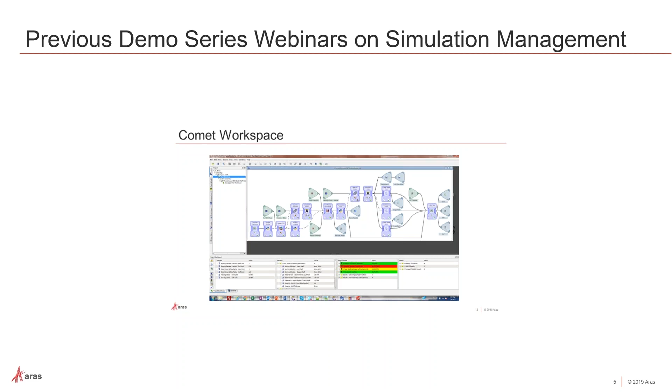So in the second webinar in May, I showed how simulations could now be created, launched, and managed from inside the Aras platform, and how Aras could create a digital thread to ensure that product development teams could easily track what simulation was performed on which version of the design, what results were obtained, who reviewed and approved the results, and where the results could be found. So this approach significantly increases the value of simulation, as teams now have access to the full history of simulation performed on their products.

So now in the third webinar, I'm going to present a much richer environment for product development teams to perform and manage simulations. I'm going to demonstrate how the Aras platform can be used to create, launch, and manage simulations. The user defines what changes should be made to the design and what changes should be made to the environment that's to be applied to the design.

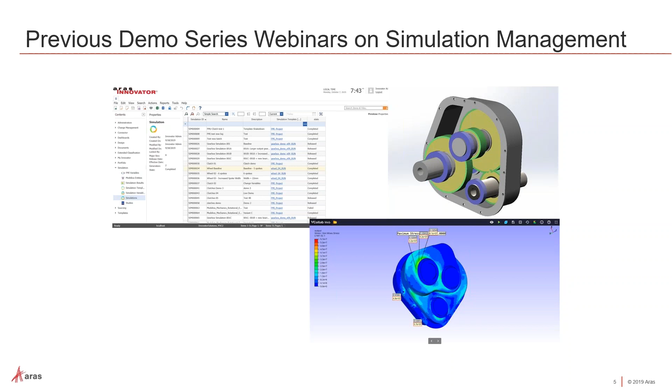And then Aras takes over, communicating with CAD tools, with system modeling tools, with finite element meshing tools, with solver tools, and post-processors. And Aras runs all the simulations and then produces a report. Now that's fairly similar to what I showed in the last demo series back in May, running simulations from inside Aras, but there are three new enhancements that I want to highlight today.

Firstly is tracking trees of simulations and of designs. In simulation land, you hardly ever go from simulation 1 to simulation 2 to simulation 3 to 4. You go from 1 to 1A to 1B. I've created simulations like 1B final, which you can guarantee means you'll need to have another one. So it's important that you track your simulations, understand the decision process that made you go from this simulation to that simulation. What were the differences in the inputs? What were the differences in the outputs? Why did I make those changes? So with a tree of simulations and designs, we can track that from inside Aras.

The second enhancement I want to highlight is chaining simulations together, where we take the results from one simulation and use them as inputs in another simulation. The demo I'm going to show today shows a vehicle hitting a curb, and we run a first simulation, a system model of the curb collision, and we take the forces, the suspension forces, out of that simulation and automatically send them to a stress analysis of the lower control arm. So we've got automatic chaining of simulations now.

And then the third enhancement I want to show is connecting simulation to requirements engineering. Requirements engineering is a fundamental aspect of lifecycle management, and for the first time we can now connect requirements engineering to simulations. So whenever you run a simulation, you can immediately see, does this version of the design meet its requirements or not?

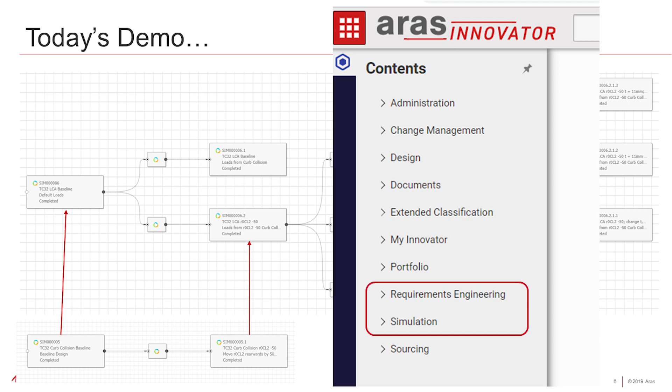So in today's demo, we're going to review a series of simulations performed on a small passenger car. I've run some of the simulations already, and we'll look at them and their results, and then I'll create, launch, and review a new simulation live during the webinar. So here is the use case we're going to look at today. It is a passenger car in a curb collision, and the problem is, will the vehicle damage be acceptable? I'll just let it run through once more. Great. So that's what we're going to consider today.

Let's go back to Aras and let's look at our requirements. Should always start with requirements, requirements engineering, requirements document. A requirements document is a collection of requirements. We have 3 requirements. Let's look at the first one. During this particular use case, so a collision with a 200 millimeter curb at 20 meters per second and 28 degrees, the maximum force at one of the suspension mounting locations must be less than or equal to 100 kilonewtons.

We have another requirement which is similar at a different suspension mounting location. We've got to have a maximum instantaneous force of 20,000 newtons. That might sound like a lot of force, but this is just for a millisecond or so. And then the third requirement is for the control arm itself. In the same load case, we want our maximum stress to be less than 300 megapascals. That's a very high value, but the requirement here is that the control arm should not break. Plastic damage would be acceptable.

Now, of course, a real vehicle or a real product has many sets of requirements. This is a gross simplification, but everything I'm going to show today with this minimal set of requirements and just a few simulations is scalable inside Aras for something as complicated as a full vehicle development program. So those are the requirements that we're looking at today. If I bounce back to PowerPoint again, a vehicle hitting a curb.

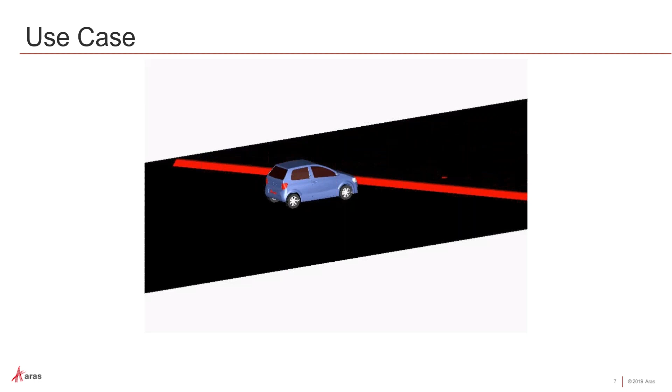So in order to assess the performance of our design against requirements, we need to run 2 types of simulations. First, we're going to run a full vehicle dynamics model. This is what you're looking at here, to calculate forces in the suspension components. And then we're going to do a component stress analysis to calculate the stresses in the lower control arm. Now, for the vehicle dynamics model, we're using a Modelica system model created by Modelon using the Modelon Impact tool, which has been exported as an FMU, a functional mock-up unit.

And the FMU contains definitions of all the variables and all the equations used by the model, and it can be run in isolation. So I don't have Modelon Impact on my laptop, so I'm just going to show some pictures. And that's an interesting point. I don't need to have many of the tools that I'm going to use today on my laptop. Some of them I do, some of them I don't. I can set up Aras so that all I need on my laptop is a browser with everything else running on one or more remote servers.

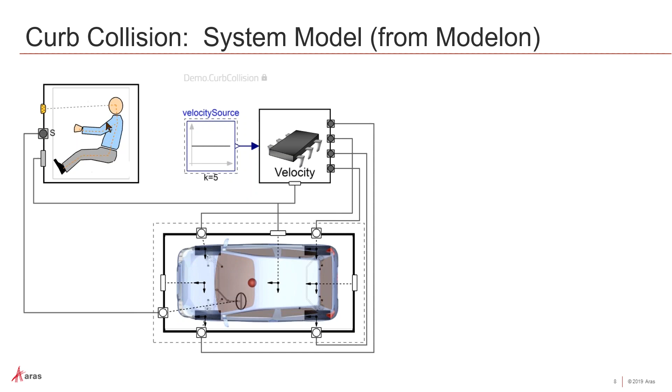So here are some screenshots of the system model. Here's an overview. We've got a vehicle representation, a driver, operating conditions. Here is the chassis subsystem. Here is the front suspension subsystem.

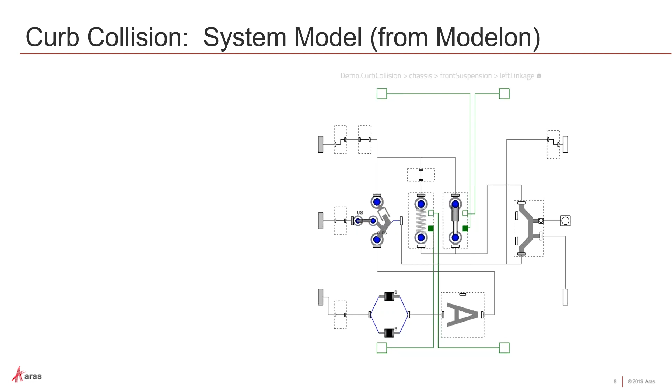And if we go down even further, here's our system representation of the front left linkage. And one of the components represented here by this sideways A is the lower control arm. Now the user, when running this system model, has full control of the geometry of the different suspension components. So these are some of the inputs that we can vary to change the design of the suspension.

And I've imported the FMU, the functional mockup unit representation of this system into Aras, and I've already run it a few times, making various changes. In particular, I moved the suspension hardpoints, as these have a big effect on suspension loads. And I've set up Aras to extract the forces and moments at the suspension attachment locations, and then apply those loads into a finite element stress analysis of the lower control arm.

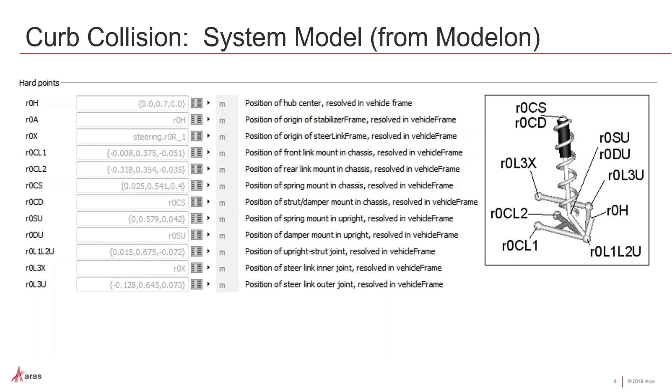So back to Aras Innovator. We've used our product engineering application, and I've created a representation of our lower control arm. So here's the part, TC32 front lower control arm. I can see I have a CAD document attached to it. If I open up this CAD document, here we go. Just take a moment to open it up.

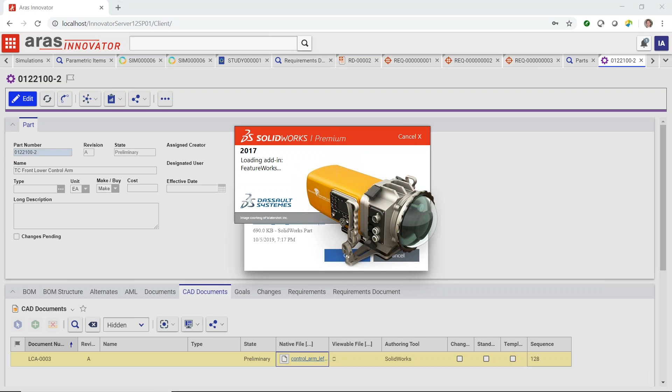This is a SolidWorks model. I can see that I've got a parametric design representation of my lower control arm. And some of the changes that I can make to this, either inside SolidWorks, which is what I'll do now, or inside Aras Innovator and having Aras communicate with SolidWorks, the sorts of changes I can make is I can move the suspension locations, I can change the thickness, I can change these angles to bring this section forwards.

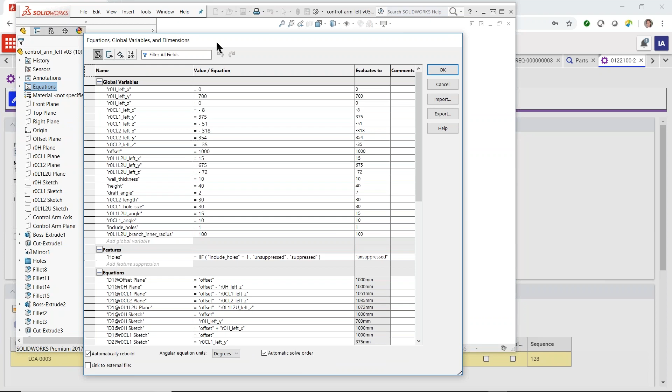So let's just show one of those changes inside SolidWorks. So manage equations. This is a fairly big change, but if I change the X location of the rear inboard attachment location from 318 to 368, when I hit enter, it will automatically rebuild, and you'll see this mount location jump to the left. So that's the sort of change you can make live inside SolidWorks.

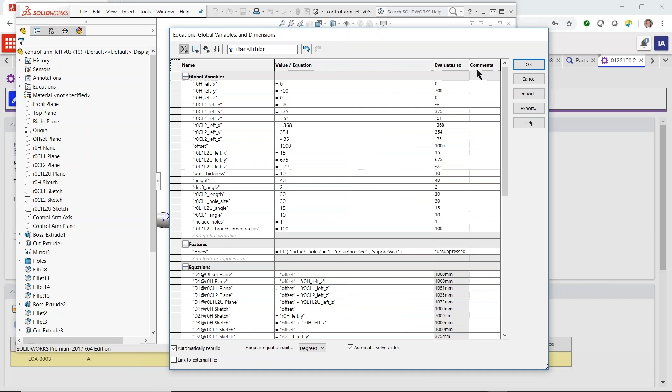And as I said a moment ago, we have a connector between Aras and SolidWorks. That means when I define inside Aras that I want to make this change, the change will get sent off and the CAD will be rebuilt. So I've just described connections to two tools, Modelon Impact, from which I imported the system model, and SolidWorks. And we're going to use connectors to other tools during the stress analysis of the lower control arm.

We're going to connect to ANSA, which we'll use to create a finite element mesh. We will connect to MSC Nastran, which we'll use to calculate the stresses in the lower control arm under the application of the loads from the system model. And then we'll use VCollab to create a smart report, a lightweight, viewable representation of the simulation results.

And these are just a few of the many simulation-related tools that Aras can connect to. And we are vendor and tool agnostic, which means we don't prefer or put limits on the tools that can be used during the simulation process.

So here we are again in Aras Innovator. This is version 12 with its new and improved user interface. Let's just close a few windows. I understand in the next service pack you can close multiple windows, multiple tabs much more easily. But I'm a real fan of Aras Innovator 12.

So today I'm going to show how the user can use Aras to create, launch, and manage simulations. The user defines the values of the design variables they want to use, and then Aras takes over. It'll run the system model of the vehicle curb collision. It will extract the forces. It will then communicate with SolidWorks to build the new geometry. It will create a finite element mesh, run a stress analysis using the forces, post-process, and report.

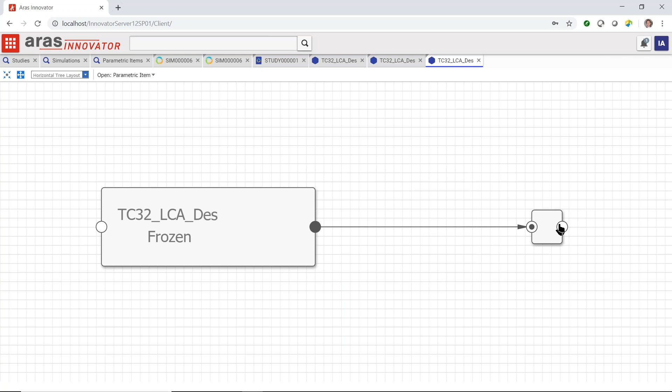So we need to be able to make changes to these design variables and then track those changes. And as I said a moment ago, that's generally not going to be a linear process. So we've implemented the concept of trees of designs to track our designs. So let's go back to our baseline design. Let's go into graph view. Here we're using graph navigation, a fairly recent addition to the Aras platform. Very powerful. Let me just expand some of these nodes.

Here are a tree of designs that I've analyzed. I started with a baseline design. I then created a variant, design 1. I then created 4 variants, 1.1, 1.2, 1.3, 1.4, and then I created a design variant from 1.4. So I can use this tree to review what I did or what my colleagues did. I can add notes to explain the decision process. And so this gives a very rich view of the work that has been performed.

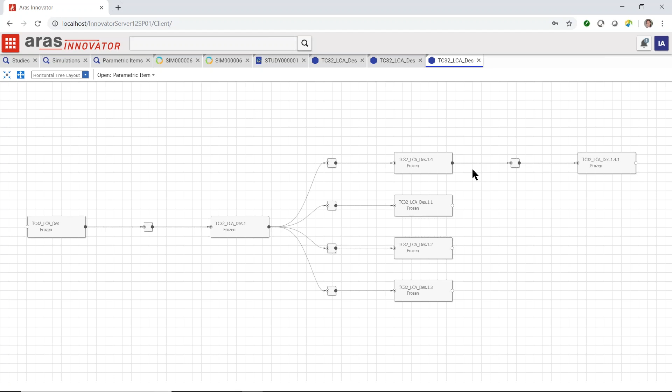And we have something very similar for simulations as well. That was for a design. But if I look at simulations, here is my simulation, my curb collision simulation. Let's expand some of these nodes. Now for the curb collision, I've just run 2 simulations. I ran a baseline and I ran a simulation where I moved one of the suspension hard points rearwards by 50 millimeters. So let's look at the baseline simulation. Here it's using the baseline design, baseline environment, baseline simulation instructions.

If I look at my simulation results, let's start off by looking at the results for which I have requirements. I can see that my R0CL2, that's one particular mount location, its maximum force is 11 kilonewtons. Yep, that meets our requirement, good. But one of the other points, R0CL1, I see, our maximum force is 101 kilonewtons, which does not meet our requirement. And I can see that immediately just by coming into the results.

So go back to our graph view. I then ran a different simulation, 5.1, where I changed the suspension mount location, moved it rearwards by 50 millimeters. Now, when I look at my results, I see first force, yep, that meets its requirement. Second force, yep, that meets its requirement, great. And the other results I have are the X, Y, Z forces and moments at the various suspension mounting locations. And these are what we're going to send to the stress analysis of the lower control arm. So let's now go look at some of the lower control arm stress analyses.

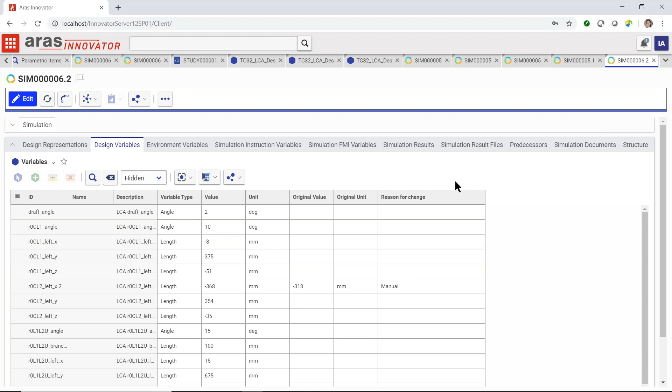And then when I look at my predecessor simulation, I can see that for this stress analysis, I was taking the loads from a predecessor simulation. This is the simulation 5.1. That's the curb collision. So I don't have to manually go and get the results from one simulation and copy them over and apply them to the new simulation. Aras is taking care of this.

If I look at my environment variables, these are the forces that are actually going to be applied to the control arm. I can see instead of being 1, 2, 3 newtons, which is the original values, the values have now been updated to the values from the predecessor simulation. And here I have reason for change, predecessor.

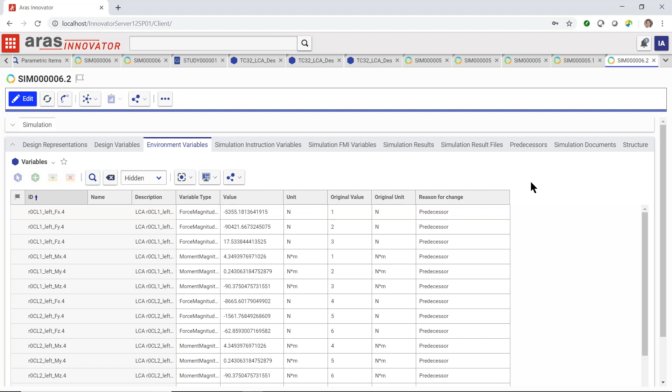So I can track what values have changed in my simulation from a design point of view and an environment point of view. And I can see the reason for the changes. Was it a manual user change, or was it done when I specified a predecessor? I'm sure this looks powerful. It may look a little confusing as well, but I'll show you in a moment that when you actually do this, it's really easy. So while we're talking about this simulation 6.2, let's have a look at some results.

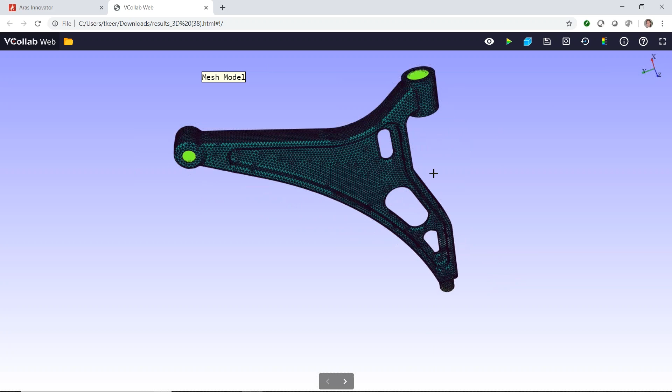Maximum stress was 350 megapascals. That doesn't meet our requirement. Let's look at some simulation results. This is a smart report created using VCollab, and we can see here's the finite element mesh that was created automatically by our automation process, reaction forces, displacements, and here are our maximum stresses. And the hotspot, that 350 megapascal stress, is right here, close to the front mount location.

So we're going to make some changes to the model in a moment, and I'm going to increase this angle and this angle too, to bring the section forwards to give it more depth, more moment capacity, and hopefully the stresses will come down. So that's a simulation I've done previously. Let's create a new simulation. I'm going to start with 6.2.1, this simulation. I open it up and let's see.

Previously, some changes that were made were I moved the suspension point, I changed the thickness, but despite making those changes, my maximum stress was still too high. 336, a little lower, but it was still too high. So let's run a new simulation based on this simulation. So first thing is I've got an action here, create a child. Takes a few seconds. Okay, child has been created. If I go back to my list of simulations, refresh the search, I've just created 6.2.1.5. So let's open this simulation and let's make some changes to it.

Firstly, I need to document what I've done. Change section angles. I need to change some design variables. Previous experience suggests the sorts of things I might want to change are to change this angle from 10 to 15 degrees. I want to change this angle from 15 to 20, and hopefully this will reduce the stresses. I want to keep everything else the same. I could change my environment variables. I could use a predecessor simulation, but I'm happy with the predecessor simulation I've got already.

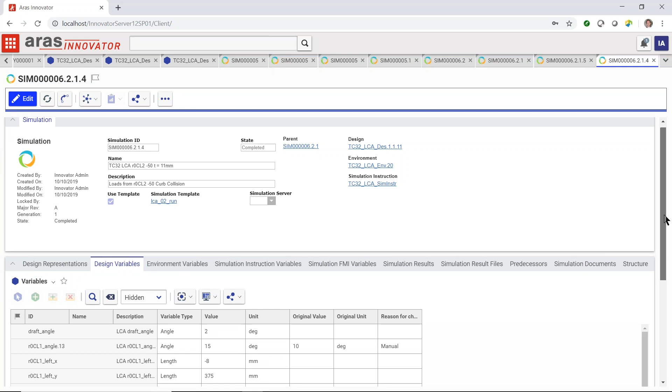So while we continue to wait, let's go back to our simulations, and I actually ran an identical simulation earlier today, just in case this one didn't finish in time. I forgot to update the title, but this does have the design variables where I changed my angles as well as the previous suspension location and thickness.

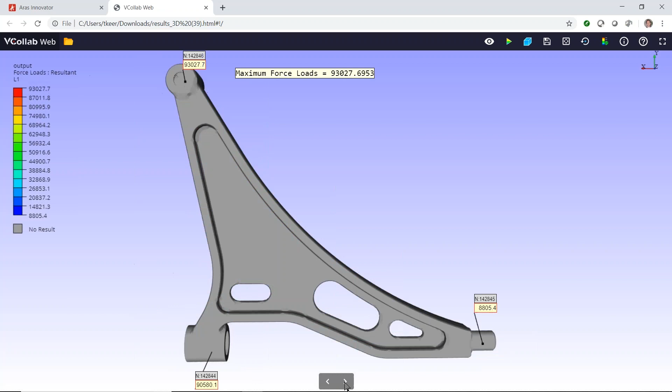So if we look at the results of this simulation, we see, oh, excellent. Our stress is now 293 megapascals. It meets its requirement. Good news. I can look at the results file, VCollab, and see, I'll jump straight to the stresses. Look at the stresses. Yeah, the hot spot is still in the same place, but it's reduced in magnitude, which is good news.

If I had more time, I would now show how I can send this simulation off for review so that somebody else can review the simulation and approve it. Don't have time for that. We're running out of time for the webinar.

But what I'd stress here is that simulation, just like any other application inside the Aras platform, can be an integral part of the management of the product lifecycle. So life cycles, workflows, permissions, and so on. And you, the user, have the flexibility to set up workflows and life cycles in the way you want. And remember that as you configure Aras Innovator, you don't have to worry about future upgrades, as we, Aras, guarantee that we will take responsibility for upgrading our subscribers to new versions of Innovator.

So just about at the end of the webinar, in summary, what I've shown is, Aras Innovator can support simulation management. As was the case back in May, we can define, launch, and manage simulations from inside Aras. Tasks can have the appropriate rules embedded based on guidelines and experience of the expert users. And we can use the digital thread to track details of all simulations. We can know who performed a simulation, on which version of the design, what the principal results were, and who reviewed and approved the simulation.

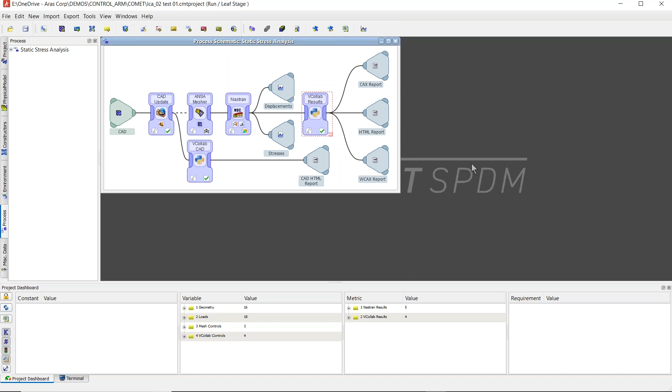All right, and the last question here that I'm going to take for today, can I run simulations on my HPC cluster or a public cloud like Amazon Web Services or Azure? Yes, absolutely. As I said, I think towards the beginning of the demo, I could set this up so all I have on my laptop or workstation is a browser,

and I could connect to server number 1 running Aras Innovator, and I could connect to server number 2 running the simulation automation engine, and I could connect to server number 3 running Nastran, Abaqus, ANSYS, LS-DYNA, whatever, in the cloud. So any combination of local, on-premises, cloud, you can pick and mix and run where it's most effective to run.